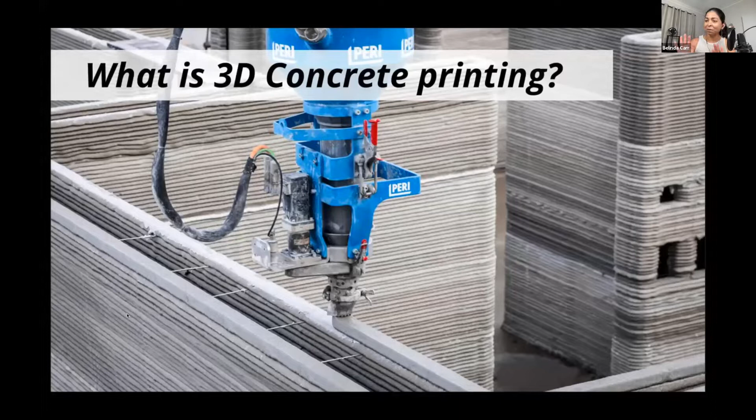So just a brief, oversimplified introduction to 3D concrete printing for anyone who doesn't know what it is. I have a PLA printer in my home here, and many of y'all might have that too. A 3D concrete printer operates in a very similar fashion to a home printer. 3D printing is basically an additive manufacturing technique. Instead of taking material away like a subtractive technique, it adds material, printing layer upon layer to create a three-dimensional structure.

The main steps in a 3D concrete printing process: you start with a 3D model made in some CAD software, whether Revit, AutoCAD, Rhino, Grasshopper, whatever you prefer. You come up with this 3D model, then slice it into layers, and after slicing, you convert that into what's called G-code, which is basically the X, Y, and Z coordinates of every point on the wall.

That information, those X, Y, and Z coordinates, is fed to a machine which tells the printer head where to go. The X and Y coordinates tell the printer where it needs to pump out material on a single plane. The Z coordinate is in the vertical direction, telling the printer to move up to the next layer after printing one, and print it.

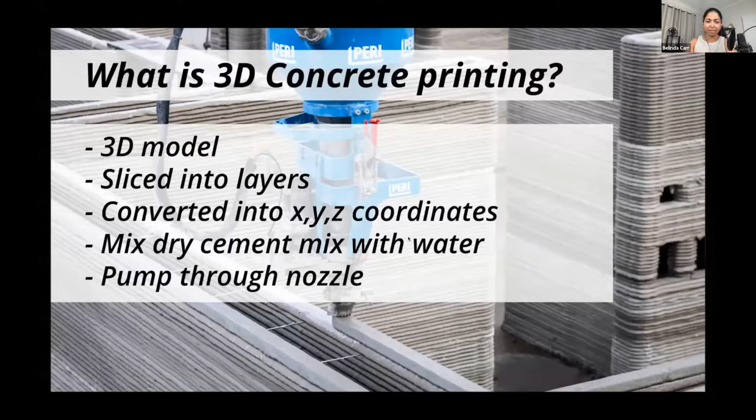Now, the printer itself, there are two main types. One is a gantry system, which consists of four vertical towers that support a horizontal system on top, called a gantry. The nozzle head can move sideways, in X and Y, and the whole rig can move up and down, in the Z direction.

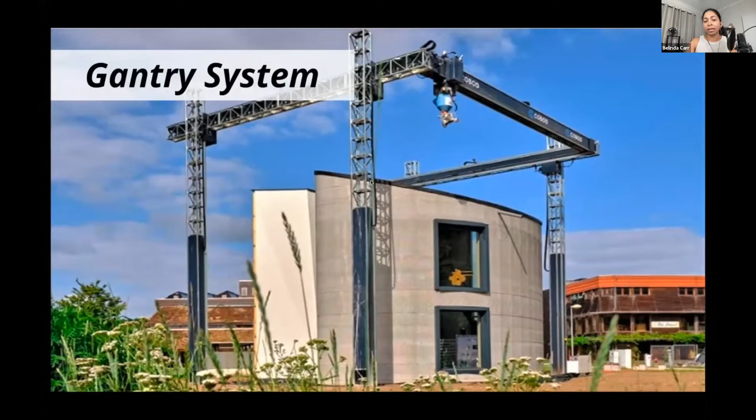The other type of system is a robotic arm, which sits in one location. Robotic arms are used all around the world for all sorts of things, like on cruise ships, where they're used to make drinks. Here, you're using the same robotic arm, just with a different head, a nozzle head. It can move in the X, Y, and Z directions because of the pivot points.

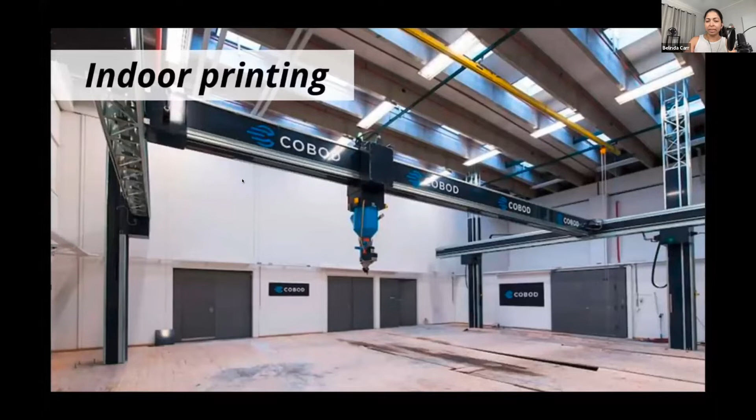So 3D concrete printing can occur both in an indoor environment, like an enclosed facility where you control temperature, humidity, and moisture levels. In the beginning, when people first started experimenting with 3D concrete printing, many prints occurred indoors because you have better control over variables, and mortar mixes had a lower margin of error.

But we've learned a lot in the last couple of years, and we're now able to print outdoors. The mortar mixes are more resilient, so they can be exposed to the elements. The obvious advantage of printing outdoors is saving on transportation costs, you don't have to print in a facility and then spend money transporting it to the site. You're basically printing on a concrete slab, and once the print is done and the walls have cured, it's set in place.

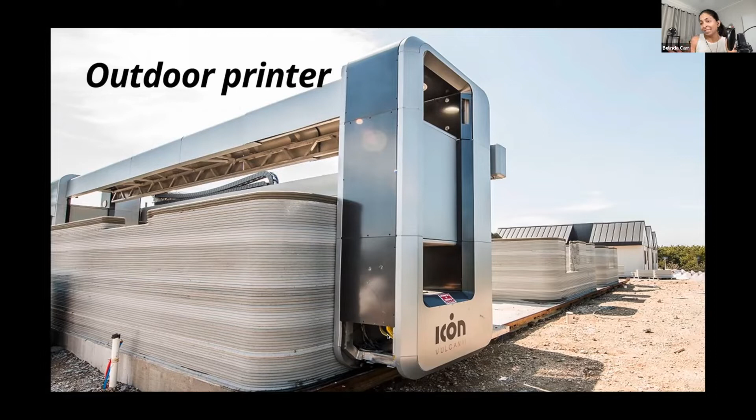All right, so let me know if I'm talking too fast, I need to slow down. Belinda, you're fine, your pace is perfect, your content's on point.

Okay, so now this brings us to the second part of the presentation. We're just going to go over some of the common myths about 3D concrete printing, things that I've heard a lot of people regurgitate because of articles that were released promoting these kinds of myths and hyperbole.

This is such a new industry, there are so many variables involved. Every company is using a different concrete mix, and everyone is in an experimental stage, no one has scaled up. You can't make such claims because they're unfounded.

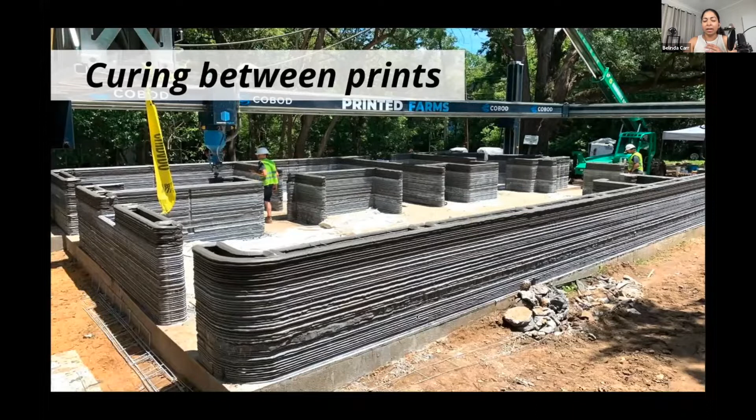If you read claims of printing in 24 hours, they're ignoring the setup time to set up and calibrate the printer on site, and even the curing time, because you can't print all the layers at once. You have to print a couple of layers, wait for them to cure and harden, before they're stable enough to print the next couple.

So printing time is not the same as the construction time to build the homes. They're two completely different things, and companies should be open about that distinction.

Another myth is that 3D concrete printing will make jobs unnecessary, that it's going to solve the worker shortage and completely eliminate humans on job sites. I don't think that's true. You're automating a part of the construction of walls, but you're still going to have people operating the machines and monitoring it, people involved in the setup and dismantle. There are so many other components to building a home, like electrical and plumbing. The printer is not going to automate all the other processes involved.

And then there was another point I wanted to make about this. Yeah, okay, here we go.

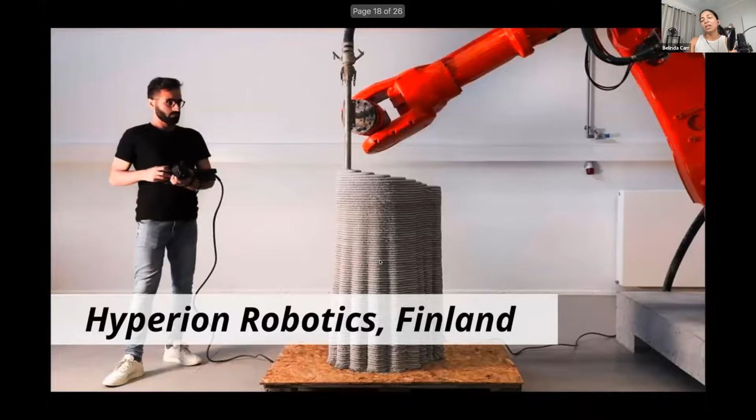It's really eye-opening, and it's made me appreciate how much innovation is going on in the field and how hard people are working to figure out the potential of this new technology and what we can actually do with it. Maybe eventually we're not going to be printing homes—maybe there's a far better application for it, but people are working really hard to figure this out.

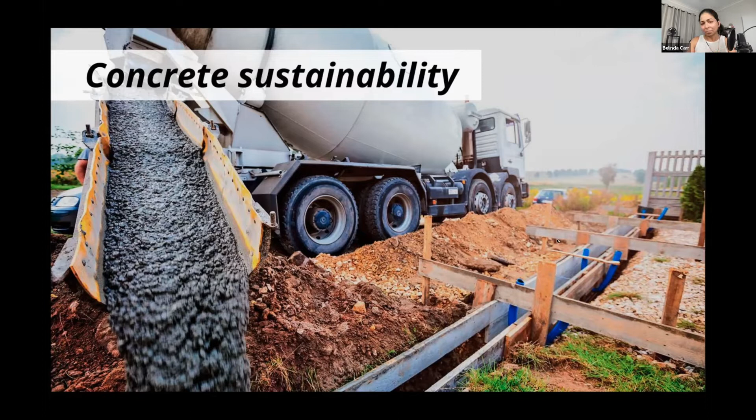Some of the many companies around the world, like Hyperion Robotics in Finland—really smart engineers who've chosen to use a 3D concrete printer for engineering applications rather than architecture. They have no interest in printing homes. I think they're printing bases for electrical towers, or footings for buildings, something like that.

They're trying to use, and I believe one of their proposals used like 75% less concrete for a footing, because they calculated exactly how much concrete would be needed rather than just dumping concrete into a cuboidal form and having a solid block. They figured out where concrete was needed and the ideal shape of a footing, and were able to bring the amount of concrete used down to 25% of the original form.

Another one is Vertico in the Netherlands—again, really smart guys, and when I say guys, I'm including men and women. They're experimenting with different kinds of nozzle heads—what's the next generation, what's the most resilient nozzle head or 3D printed design. They're also experimenting with certain mortar mixes, trying to refine the 3D concrete printer and nozzle head itself.

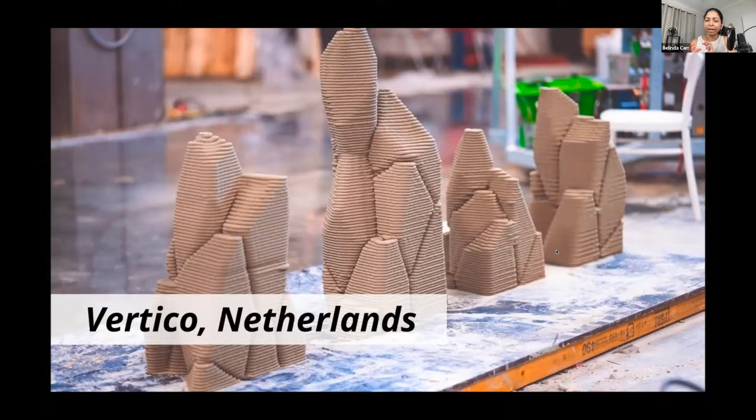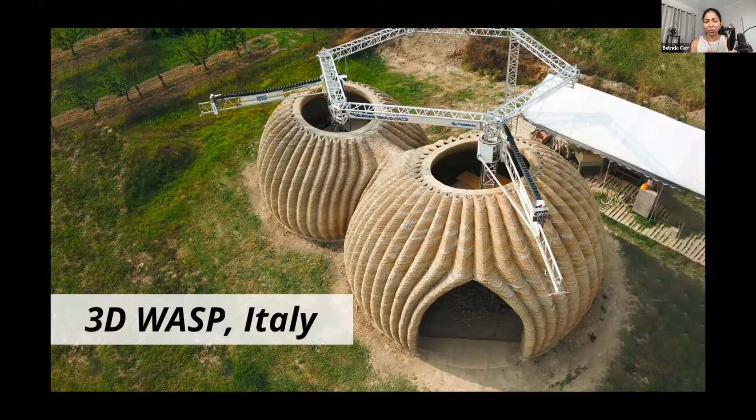Then there's companies like 3D WASP in Italy that decided, hey, let's experiment and see what happens if we use earth rather than mortar or concrete mixes. They wanted to make something more sustainable, and they made these two very interesting domes out of local earth rather than concrete.

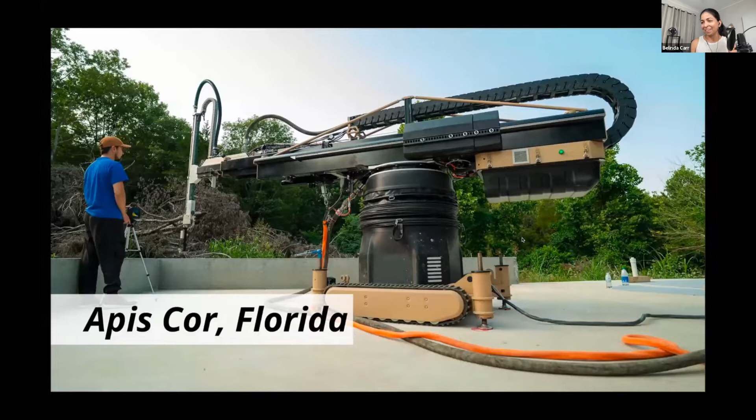This is a company I recently visited just two weeks ago, Apis Cor in Florida—really cool. They have a showroom in Melbourne, and they've put wheels on their robotic concrete printer. So rather than it being stationary, their idea—you can see it kind of looks like a mini tank.

But of course, it has these supports so that it's stable on the ground, so it's not going to move while it's printing. But their idea is that the robotic arm can print a certain part of the building, then drive off to another area and print that area.

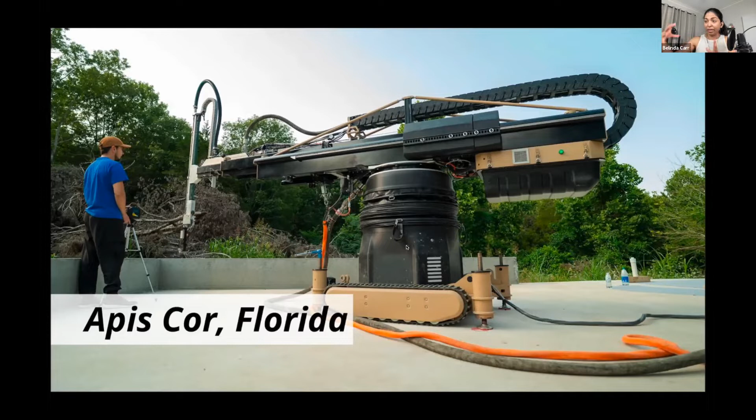They believe this is a more viable solution in the long run rather than the big gantry system, because they think the gantry system is like when you disassemble and reassemble things, like with IKEA furniture - things just don't fit the same way the second or third time. Things get loose, and it's like, how many times can you realistically reuse elements?

That's their theory. So they've gone down the path of exploring the potential of a robotic arm printer rather than a gantry system. And of course, there is Icon in Austin, one of the biggest and local 3D concrete printing companies. They've gone down a very interesting path, which brings me to the last part of this presentation.

Their prints - the one word that comes to mind is just refinement. I visited another 3D concrete home in Canada, and I've seen a couple of other 3D concrete printing projects, but Icon is tackling style and refinement in a really beautiful way. And I really respect that.

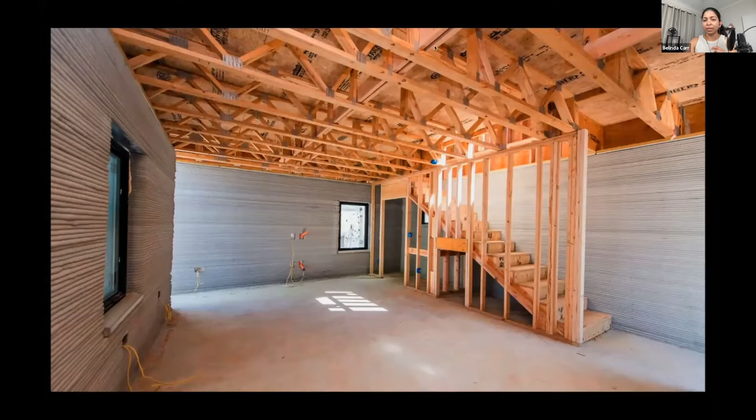So this was the home that I stayed at overnight last year, I think in November. This is a home in Austin. The lower part, as you can see, is made of concrete, and the upper part was made with traditional stick building.

So they collaborate really well with the architects and the engineers, and they want to come up with something that kind of makes Austin and the inhabitant really proud. Like once you're in that home, you feel like you're a part of history. You feel like something is different.

The moment you walk in, it is just very polished and super quiet because it's basically a concrete home. And they just take a lot of care in how the home is presented to people, and I really appreciated that.

As you can see here, their prints were not as refined as it is now. You can see by the window, it kind of bulges out. There's a lot of things that they have improved.

This is their most recent home, I think it's called House Zero in Austin. I haven't visited this one, but there's significant improvements compared to this earlier home, which they printed 1.5 years ago, I believe.

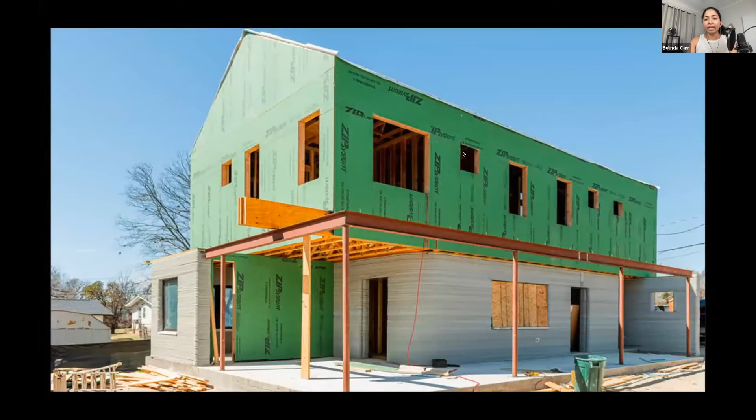So again, they used a zip system, traditional wood framing for the upper floor, and then concrete on the lower floor. So I'm just going to end it with this slide, and then we can have a follow-up discussion. When I visited this Icon home, they teamed up with a company called Positive Energy in Austin.

What I really appreciated is they didn't just print the walls and say, okay, we're done, now figure out how the house is going to function. They care about how the houses function. Positive Energy really cares, and the interior designers really care about what the interiors feel like.

Everything was so cohesive and worked so well. It felt like a really polished project. Positive Energy especially, I feel like they did a really good job with this.

They had an ERV, energy recovery ventilator, so air was constantly being circulated in the home, but it was so super quiet, you couldn't hear it. In my home, I've got a 25-year-old condensing unit, and every time the AC kicks on in summer, the lights flicker and you hear this loud noise when the fan starts turning. Nothing like that here.

It was eerily quiet in this home. It was so beautifully executed.

I just want to say that we talked about the myths about 3D concrete printing, but this is such a new industry and there is so much research and innovation going on. It is an extremely exciting industry to be in.

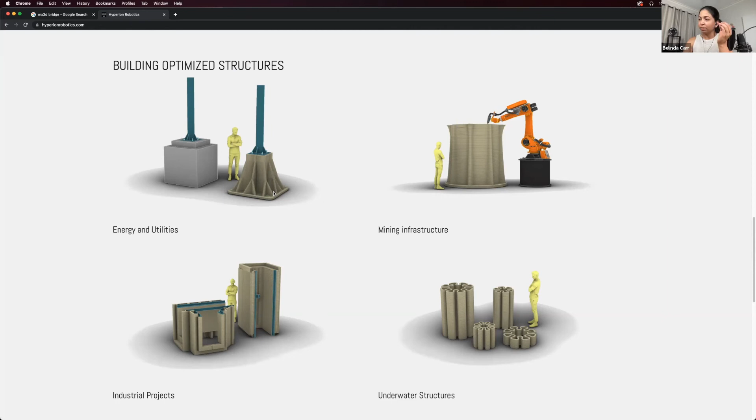Well, I'm actually looking at the lower wall where it would run two parallel around a rebar structure. So you have like more traditional rebar idea, depending what material is used, but you need to strengthen it in shear. You have to have a wall that'll stand up and not be blown over, and you need to check how it's going to be stronger.

I'm gonna have to connect with you after this and discuss - I've got this in my head, but I don't know if I'm articulating it well. I'll send you my email address so we can continue this conversation later. And Reed just threw a good link in the chat to add to your conversation, so maybe check that out as well.

Sean's turn now. I didn't want to take away from the stuff, I just wanted to have a little bit of story time in Seanland. About 6 years ago, I went down the 3D printing house path and was trying to figure out, okay, if concrete's an issue with embodied carbon, how do we look at different alternatives? So I was planning on building a passive house duplex.

Working with the University of British Columbia Center for Advanced Wood Processing, they had a 3D printer, and I actually got my house printed using a wood filament. I went down the road of thinking, could we scale this 50 times and build a house out of wood? But when you look at the waste factor, waste wood should be separated into two things: the structure should be reused, like what we see with Unbuilders who have really nice 2x4s that are 110 years old that we could repurpose and prefab, and the wood fiber should just go into insulation.